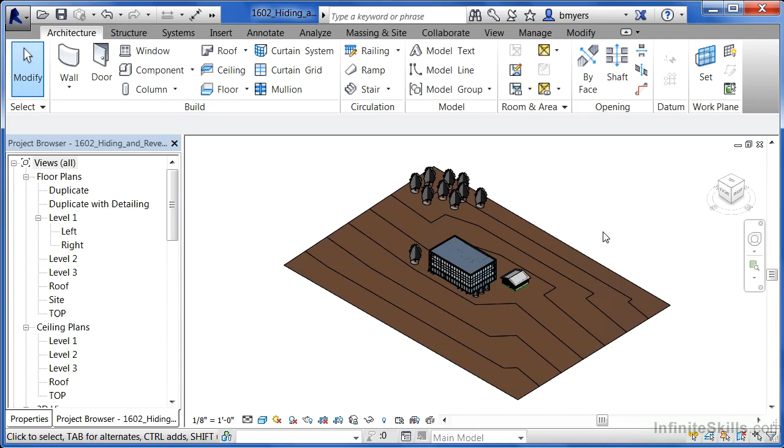Revit has a property that allows it to hide elements as well as reveal hidden elements. To hide an element in Revit, in this case we're going to go into this 3D view. The element I'd like to hide is going to be the roof. Move your mouse over to the edge of the roof and then click when you get to select on the roof. Whenever you select on the roof, it gives a certain transparency level so we can see through it. But for this instance, I just want to hide the roof.

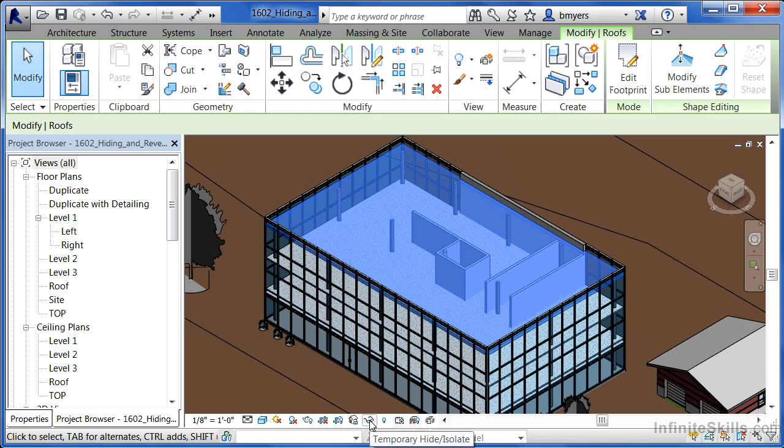Once it's been selected on, you can come down to the bottom of the screen and click on this temporary hide isolate button. It looks like a pair of little eyeglasses. Now there's 4 different things that we can do. Ultimately, we'll pick on hide element, and that's just going to hide this thing that we have selected. We could isolate the element, which will only show the object that we have selected.

We could hide the category, which would hide all the roofs in the project. So not only would this roof hide, but this roof over here would hide as well. Or we could isolate the category, which would mean only the roofs in the project would show up. In this case, I just want to hide the roof. So I'm going to select on hide element.

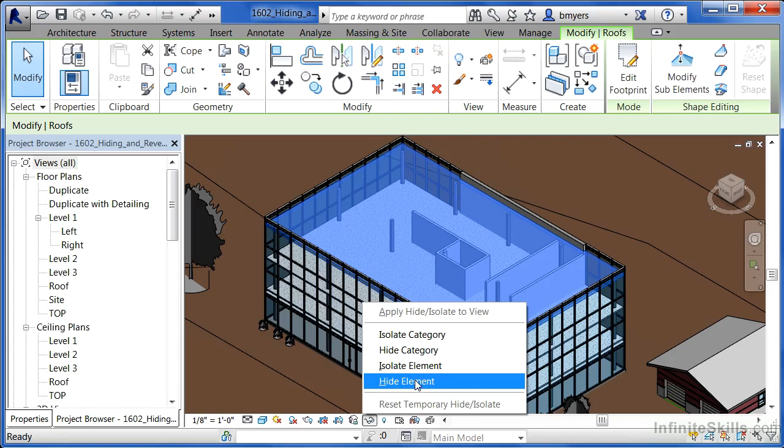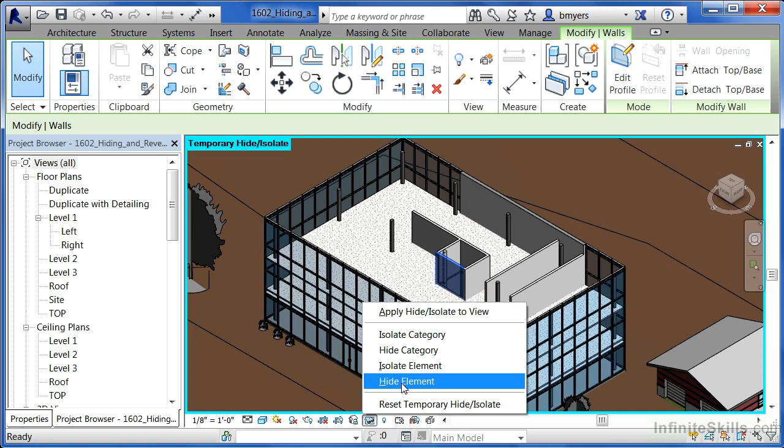Another example of where we might want to use that would be in the case of this wall here. We might want to select on the wall just so that we can see through the wall to get a better idea as to what's behind it. When you select on it, it does give it a transparency level, so you may not need to hide it. But if you do, once again, you can come back down to the bottom of the screen and select hide element again. And now it's just going to hide that wall.

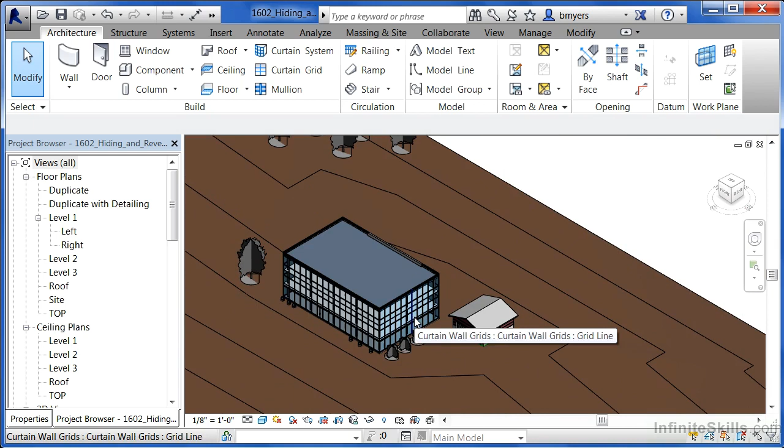Now, if we want to get these walls back in a hurry, we can do it. Come down here, select the temporary hide isolate button. And if you select on reset temporary hide isolate, those objects will immediately come back. Another option that we have, though, is to be able to hide the entire category of object, or be able to hide it permanently. If we do that, we just move our mouse over, and in this case, I'm going to hide the topography. So I zoomed out, I'm going to select on the site, come down here to the little eyeglasses, and in this case, we're going to hide this element.

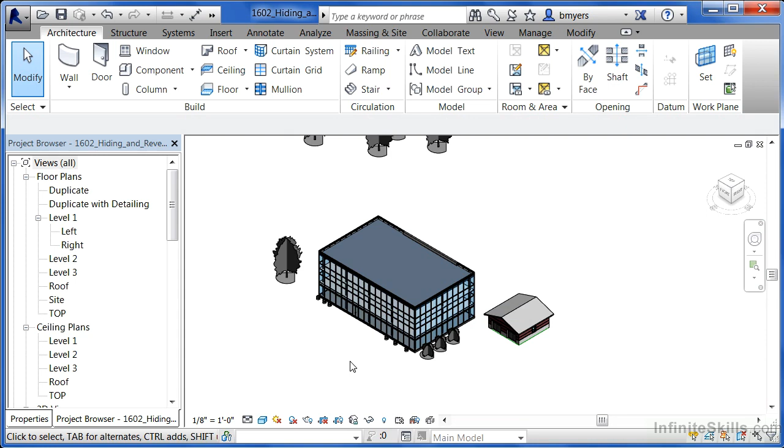It's hidden, but there's a property about temporary hide isolate that I should let you know. Just because it's temporarily hidden, and we can tell that by the cyan color border around the edge, it's still going to plot. If we don't want this object to plot and we want it to stay hidden, we click on the little eyeglasses again and apply the hide isolate to the view. Now it'll stay hidden inside of this view, and if we decided to spin this around by holding shift down as well as the wheel, we'll be able to look at this from any direction without the site getting in the way of our line of vision.

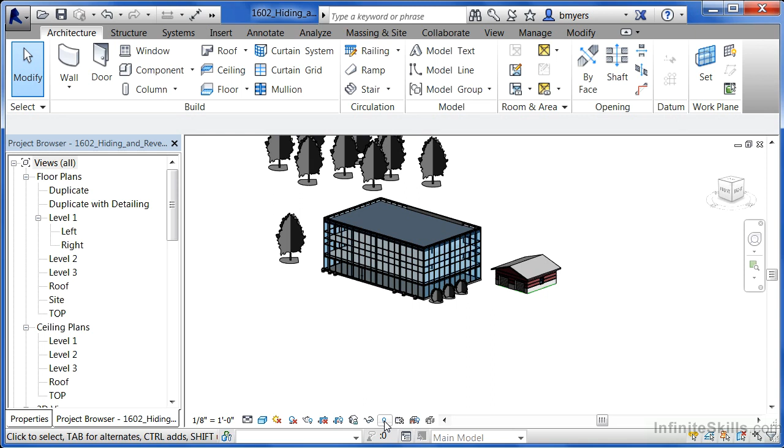But there's a very good chance, though, that we'll want to, at some point, bring this site back. Unfortunately, though, after we've applied the hide isolate to the view, we can no longer tell it to reset the temporary hide isolate because, well, it's already been applied. So to bring it back, we have to click the button right next to the little eyeglasses, which is Reveal Hidden Elements. So if you select the little light bulb tool, here we can see everything that was hidden in the view. And in this case, the main thing is going to be the site.

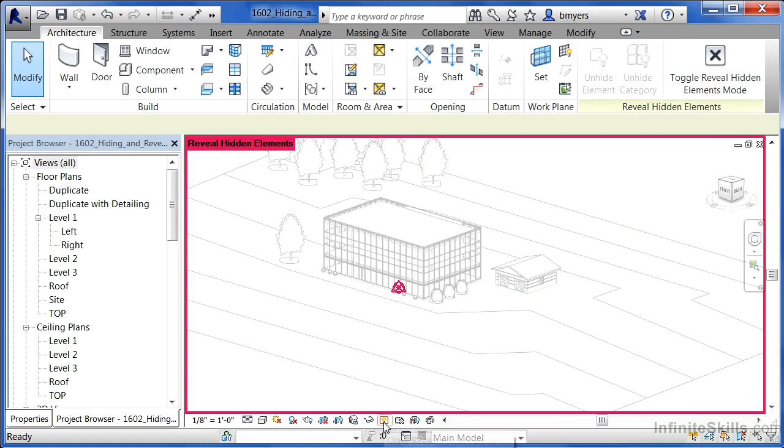So if you select back on that site, come up here on the ribbon, and then select Unhide Element. That site at this point has now come back. If we click off of it now, we can see it's no longer that color that it was. It's the same color as everything else in the view. Now you can either click on the big X, or come back down here and click on the light bulb, and we can see that the site has now been brought back in the view.

So if you want to be able to hide or be able to see only specific objects, all you have to do is select on that object first. I've selected on a little bush. Select on the little eyeglasses. I'm going to select on Isolate Element. And now only that one plant right there is showing up.

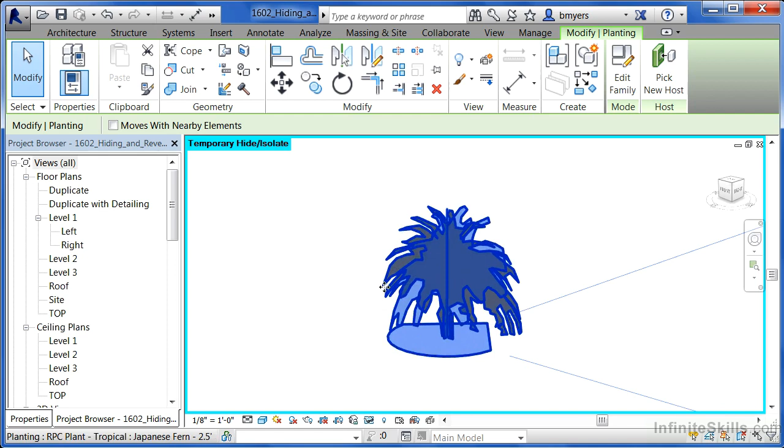If you want to bring it back, if you've applied the Hide Isolate to the view, then you'll need to select on the Reveal Hidden Elements tool, which looks like a little light bulb, to bring it back. But if you haven't applied the Hide Isolate to the view, just select Reset Temporary Hide Isolate, and everything else in your view will come back into the scene.